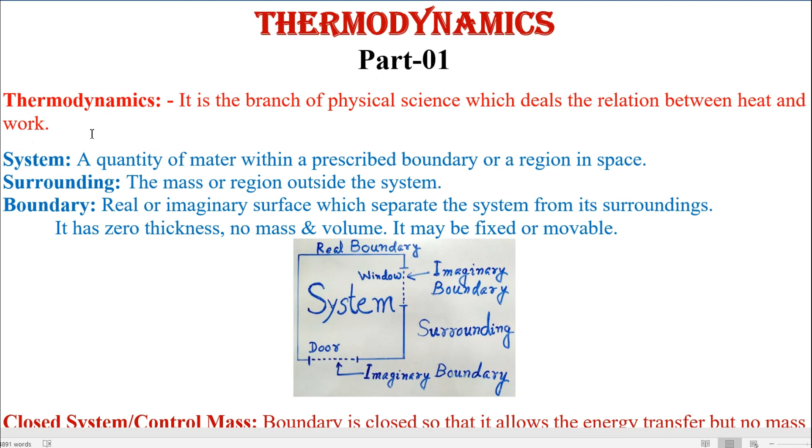Now the first term, system. What is system? A quantity of matter within a prescribed boundary or a region in space. That is, our universe is an unlimited space, so we cannot concentrate the heat and work transfer in this unlimited space. So human beings have separated a small region with a boundary, say a room, living room, which is separated by the wall, window and door from the outside.

So this room is called the system, and the wall, door, window, those are called the boundary, and the outside of the room is called the surroundings. Now, what is the boundary separating the system and surroundings? It is a real or imaginary surface which separates the system from its surroundings. For example, in your room, the wall is the real boundary, and when the window and doors are closed, they are also real boundary.

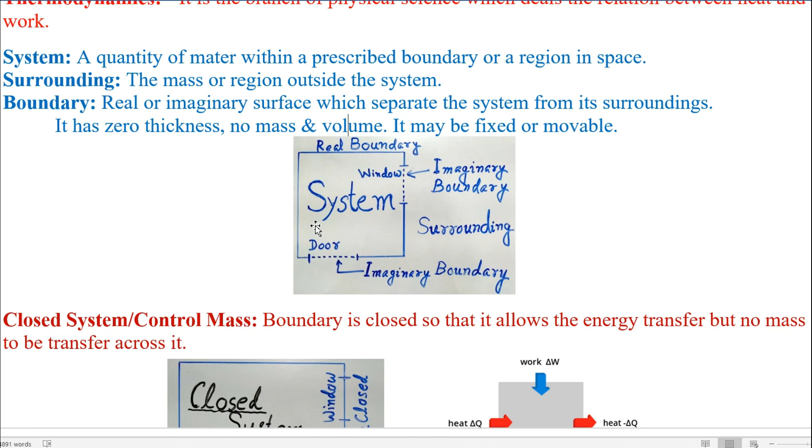Now the system is divided into closed system or control mass, open system or control volume, adiabatic system, and isolated system. First of all, we are considering here the closed system or control mass. When the door and windows are closed in your room, that is, the system is surrounded by the real boundary, not imaginary boundary, the inside mass, for example the air in your room, will not go outside, or the air from the outside will not enter into the system.

That means here energy may transfer in this closed system. Energy like heat may transfer through the window. Say the window is a glass window, so heat may transfer, but mass cannot transfer. So energy through the boundary may transfer, but mass like air cannot transfer. That is called a closed system.

In this figure it is clearly written: heat is transferring, work is transferring, both heat and work are energy, but mass is not transferred into the system or from the system to the surroundings.

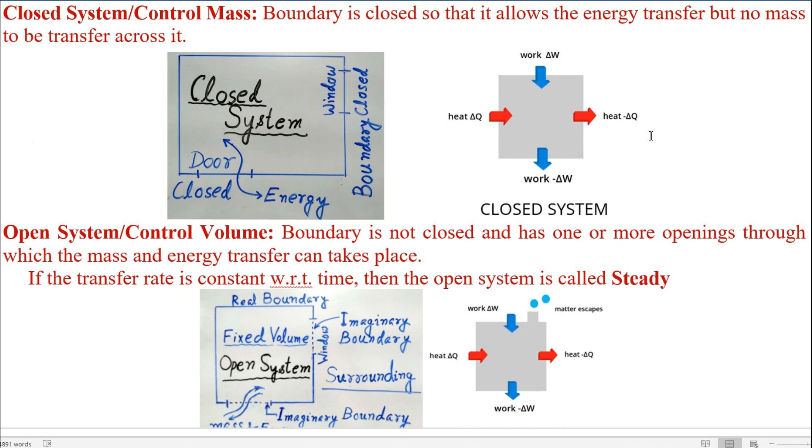Next, the open system or control volume. In this open system, for example, in your room, when the door and windows are opened, we will consider the volume of the room, considering the imaginary boundary along the windows and the doors. This volume of the room, as well as of the system, is fixed. That means this volume is called control volume, but we cannot say control mass here, because we cannot control the mass, because as the windows or doors are opened, the mass along with the energy can transfer along the boundary.

So in the open system or control volume, the boundary is not closed and has one or more openings, like a window and doors, through which mass and energy transfer can take place. If the transfer rate is constant with respect to time, then the open system is called a steady system. Steady system means the flow is steady. That means the mass transfer rate is constant with respect to time.

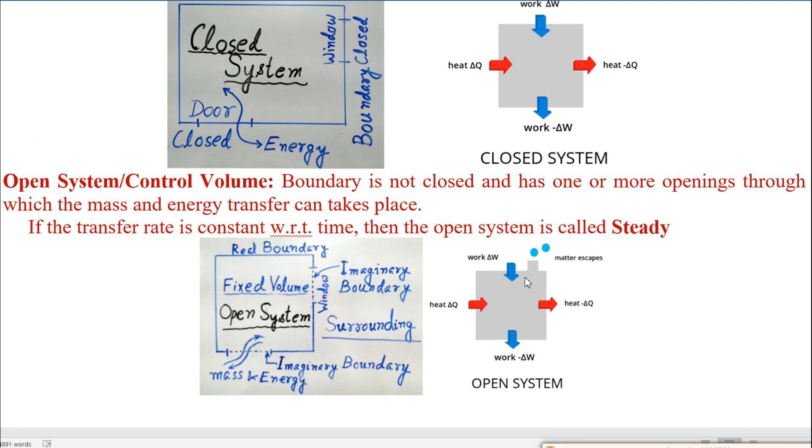Then the isolated system: for example, your room is so insulated that mass as well as energy cannot transfer along the boundaries. So this type of system will be called isolated, meaning the system is totally isolated from the surroundings.

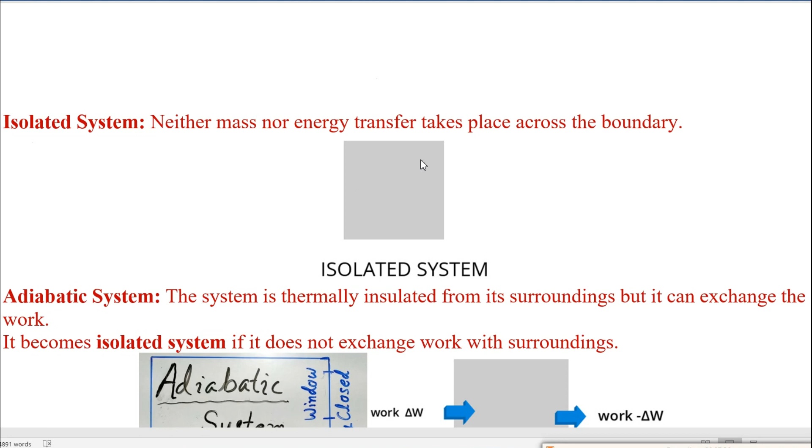Next is the adiabatic system. An adiabatic system is thermally insulated from its surroundings, but it can exchange work. So in this adiabatic system, the window and doors are closed, so it is a closed system. But the difference with the closed system is, in the closed system heat as well as work can transfer, but in the case of an adiabatic system heat cannot transfer. Energy in the form of heat cannot transfer along the boundaries. Only energy in the form of work can transfer.

So what is an adiabatic system? The system is thermally insulated from its surroundings, but it can exchange work. It becomes an isolated system if it does not exchange work with the surroundings. Mass is not transferring here, only work transfer is there. If we stop the work transfer, then the system becomes an isolated system. In this figure, only work is transferring, no mass transfer or heat transfer.

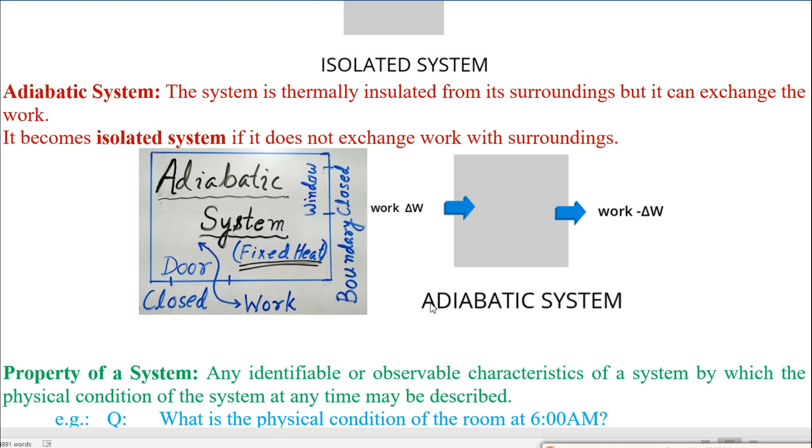Next, property of a system. The definition of property of a system is any identifiable or observable characteristic of a system by which the physical condition of the system at any time may be described. That means, what are the identifiable or observable characteristics? Temperature we can observe, pressure, volume, density, etc. can be considered as

identifiable or observable characteristics. For example, question: what is the physical condition of the room at 6 a.m.? Say temperature is 25 degrees centigrade, pressure is 1.01 bar, and the density of the air is, say, 0.25 kg per meter cube, etc. So with these properties we can express the physical condition of the room, as well as of the system, at 6 a.m.

Similarly, what is the physical condition of the room at 2 p.m.? At 2 p.m. the temperature goes from 25 degrees centigrade to 38 degrees centigrade, the pressure from 1.01 bar to 1.03 bar, and the density of the air, say, from 0.25 kg per meter cube to 0.2 kg per meter cube. So these properties change with respect to time.

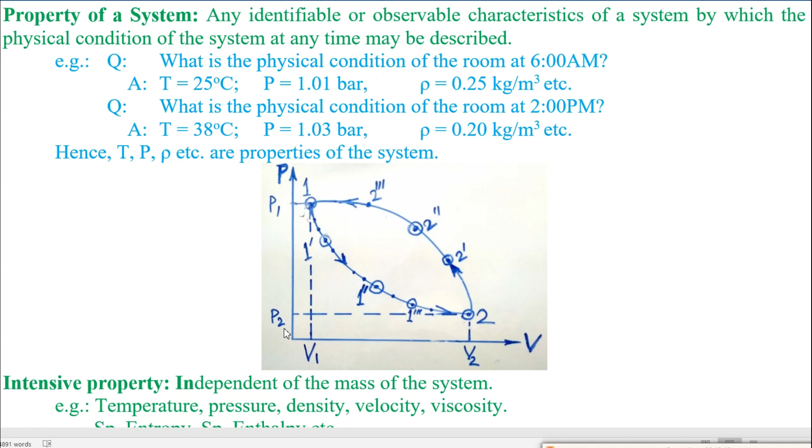So these temperature, pressure, densities, etc., are called the properties of a system. In this figure, say at 6 a.m., the pressure P1 and the volume V1. At say 2 p.m., then P1 dash, P1 double dash and V1 double dash. Similarly, here say at 6 p.m., then P2 and V2. Those are called the properties.

Now, types of properties. There are two types of properties, that is intensive property and extensive property. What is intensive property? A property which is independent of the mass of the system. For easy memorizing, the clue is intensive, independent. So intensive property is independent of the mass of the system. That means the properties which are not depending on the mass of the system, like temperature.

The temperature of the room may be, at 6 a.m., 25 degrees centigrade, and of another, bigger room, where the mass of the air is more than the previous room, the temperature may be the same, say 25 degrees centigrade. So temperature is not depending upon the mass of the system. Like pressure may be 1.01 bar for both rooms, whereas the mass may vary.

Similarly, density is the mass per unit volume, that is kg per meter cube. You may ask me why density becomes an intensive property, because there is mass per unit volume. Because when the volume becomes constant, say 1 meter cube, then mass becomes constant. For example, for water, a rho density 1000 kg per meter cube.

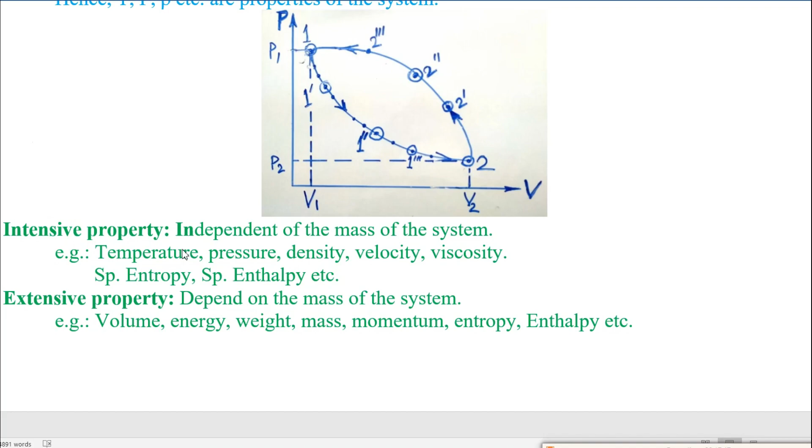Now when we use specific entropy, meaning the entropy per 1 kg mass, 1 kg becomes fixed, then it becomes an intensive property. Similarly, enthalpy for 1 kg and 5 kg gas are different, but when we consider only 1 kg mass, that becomes specific enthalpy, it becomes constant, then it will be under the intensive property. So when we use the term specific before entropy, enthalpy, then those properties will be taken under the intensive property. Students, I hope you understand all the terms which I have discussed in this class.

Further, if you have any question, please go to the comment section and write the questions. My important advice to you is that you should write all the terms, mathematical equations, all those after this class in your notebook, and revise those at least 3 times within 3 days, so that you can memorize all this for a long time.